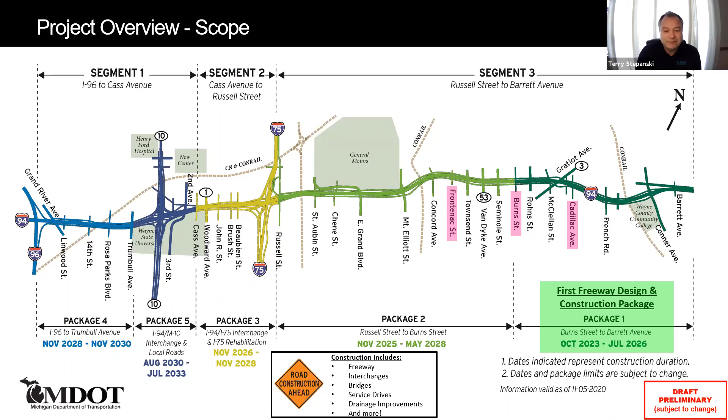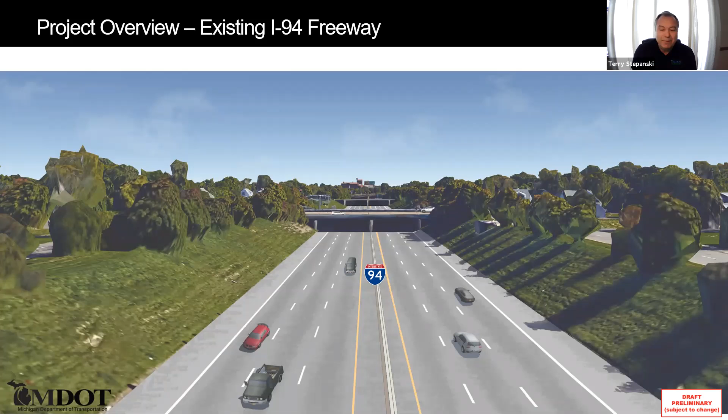Sure, there is some right-of-way impact, some property that we will have to acquire along the corridor, but for a project of this size, the impacts aren't as great as they would normally be if we weren't so focused on remaining within the existing footprint. So these are the main modernization components: wider shoulders are very important, and the acceleration and deceleration ramps being lengthened make for smoother entrancing and exiting of the freeway. Next slide, please.

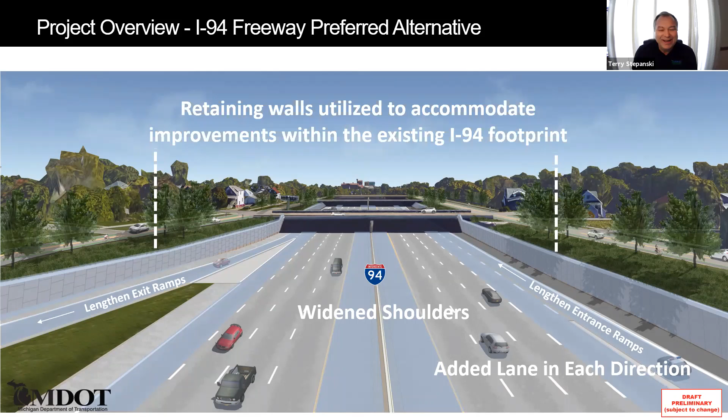The important thing here is we did have a conceptual design many years ago, designed from Detroit of the past. There's been a lot of changes in movement and traffic, changes in the population of the city, and we were really focused on making sure that the future I-94 serves the needs of residents of the city of Detroit, of the motoring public, and supports economic growth. We are really building the exact freeway necessary for current traffic patterns and also patterns in the future.

So what we did is, even though we've been working on this a long time, more recently, starting in like 2015, we were looking at taking a second look at I-94. A lot of that was spurred on by comments that we received from the public.

Some of the main things that we heard was that we really didn't need continuous service roads along the corridor, that service roads were important in some areas, but the important thing is that it connected the community. So we modified the service roads so that we had them where needed, but in other areas there was a more neighborhood atmosphere that would fit into that part of the community. So we looked at that connectivity, as I mentioned several times.

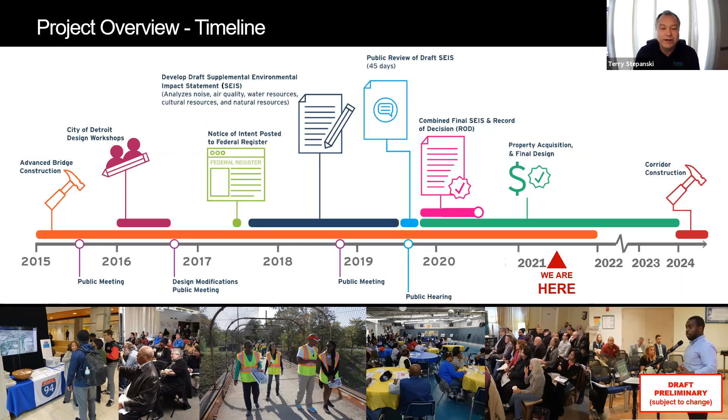The three bridges we're talking about today, Burns, Cadillac, and Frontenac, are three of those. There's several bridges that we've already done that you may have noticed: Gratiot, Van Dyke, French, and several others we've been working on. These are part of the advanced bridge phase that really need work now. So that's what we're doing. Next, please.

One of the things I mentioned this, but it's so important I wanted a separate slide for it. We've worked closely with the city of Detroit on the development of the advanced bridges along the corridor. Originally we had wider bridges that maybe were wider than they needed to be, based on traffic projections of the past. We looked at that, and based on discussions with the city of Detroit, we again looked at the width and size of the bridges to make sure they really fit into the community and provided accessibility across the freeway, meeting the needs of pedestrians, bicyclists, and of course vehicular traffic.

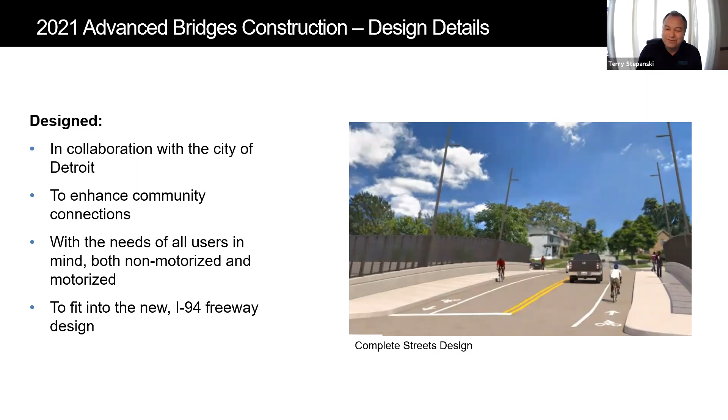So again, we've been working with the city of Detroit to make sure the bridges are the right size and fit into the community, provide the connections, and really meet the needs of all the users. That was an important component because we did modify the bridges in the more recent past to fit the community, with features like wider sidewalks and bike lanes to blend into the community.

We've added some very decorative lighting and also a constellation pattern on the bridges that will be the same as the wall. That was a result of stakeholder engagement too. The constellation pattern represents the stars in the sky, similar to or representing the star navigation that was used by the Underground Railroad. So that's just kind of a sidebar issue as to why that was chosen.

That was an extensive stakeholder engagement, and this was one of the things that we came up with as a result of discussion with the public. Next, please.

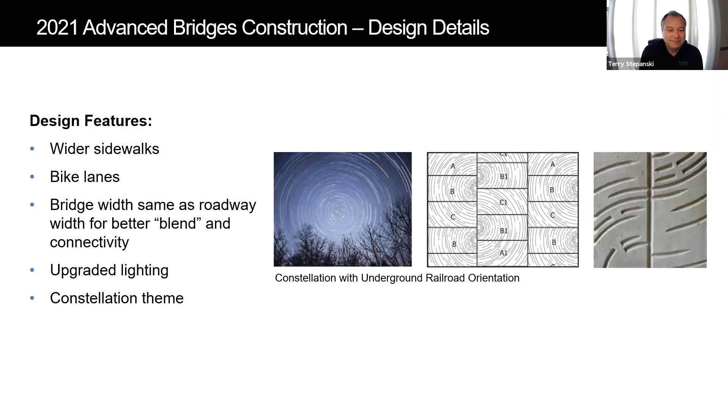And with that, I'm going to turn this over to our construction engineer, Chris Bradshaw, to talk specifically about the three bridges, Burns, Frontenac, and Cadillac, and talk about the schedule and some of the details on that. Chris, over to you. Thank you, Terry.

Like Terry mentioned, my name is Chris Bradshaw with HNTB. I'm the project engineer on the Frontenac, Burns, and Cadillac bridges. On behalf of MDOT, I'm going to go over the construction schedule for these bridges.

You might have noticed the bridges were closed on February 8th, a couple weeks ago. This was to set up the detours and the pedestrian detours and some preliminary work before the bridges can be taken down, such as utility relocations and removals, fence removals. So Frontenac Street will be the first bridge demolished, and that is happening this weekend.

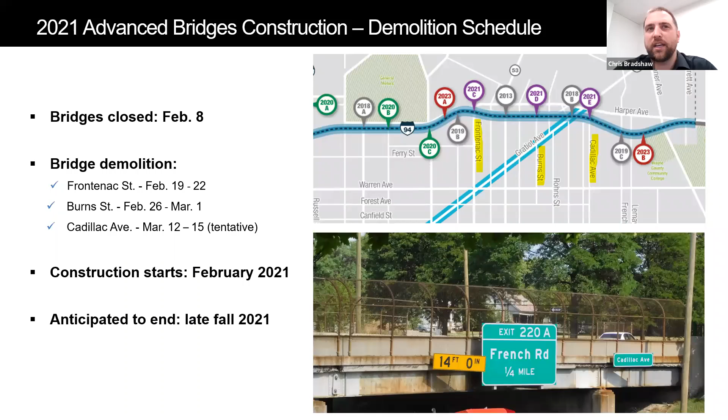Right now, the contractor is getting ready and preparing for that freeway closure. Then the following weekend on February 26th, the Burns Street Bridge is planned to be demolished. And then as of right now, March 12th, the last bridge, Cadillac Avenue, would be demolished. The contractor plans on working at all three bridges at the same time and all throughout the summer, with an anticipated completion date in late fall 2021.

We're adding 2 bike lanes, one in each direction, 8 foot wide, and then the sidewalks will be widened to 10 feet. All this is happening within almost the same footprint as the existing bridge. This adds more multimodal means of transportation, walking, biking, and still maintains the vehicle lanes.

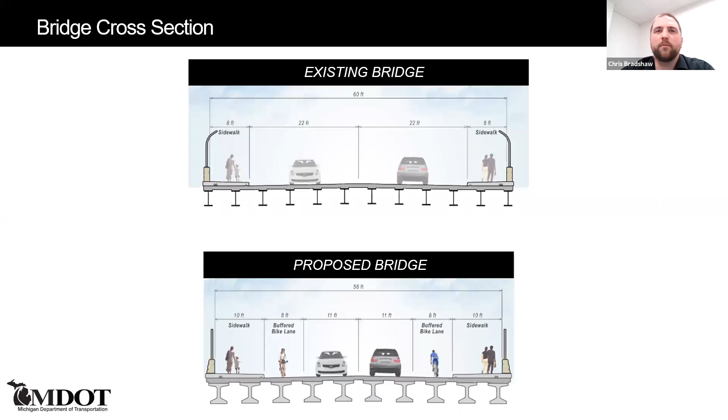So with this, Mark Smith will be presenting next on the local and the freeway detours, and I'll hand it off to him now. Thank you. Thank you, Chris.

My name is Mark Smith with HNTB, and as Chris mentioned, I'm going to walk through some of the highlights of the detour routes for both pedestrians and vehicular traffic with the 3 bridge closures. All 3 of the bridges that Chris had mentioned will be completely closed for the summer with posted detours.

The detours are already out in place for the local closures, with turn-by-turn guidance as you're approaching the bridges. For the Frontenac Bridge, the traffic for both pedestrian and vehicular traffic will be detoured to the west to use the Concord Bridge. This bridge was just recently reconstructed last year, so it's a very good bridge with wider sidewalks that will accommodate the pedestrian traffic.

Along with the closure at Frontenac, the westbound I-94 entrance ramp from Van Dyke will need to be closed. The reason for this closure is that on I-94, we're maintaining 3 lanes of traffic during the bridge construction by shifting traffic onto the shoulder, or in some cases on a temporary widening that we're constructing. Because of that, we have to close that ramp.

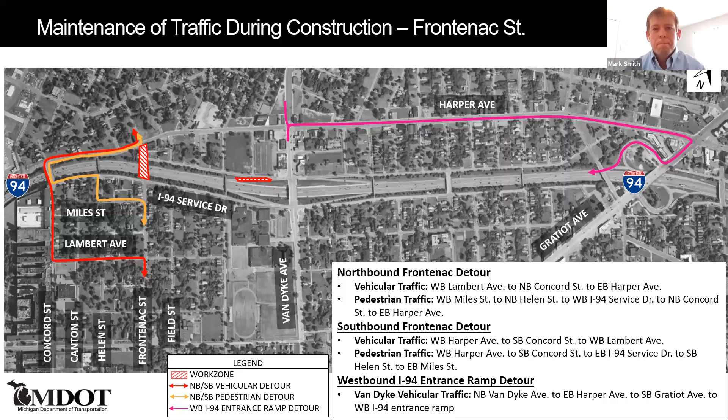For the Burns Street Bridge, pedestrian traffic, shown with the orange arrows, would use Van Dyke to the west. Traffic trying to cross the bridge heading north is detoured over to Van Dyke, and traffic heading south over to McClellan. Both bridges would obviously be open for north and south traffic. We just had the route split to try and avoid the left-hand turns of vehicles traveling across I-94.

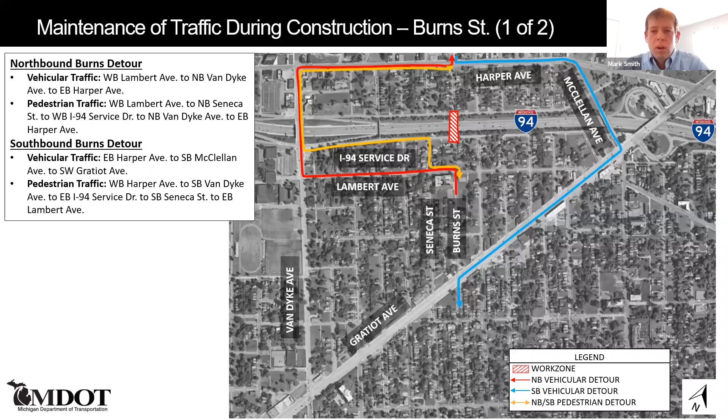Along with the Burns Street bridge construction, there will be another ramp closure. This ramp is the eastbound I-94 entrance ramp from Van Dyke. Traffic that is trying to enter originally at this ramp would be detoured east on Harper and down to the Conner Avenue interchange ramp, and would be able to enter eastbound I-94 at that location.

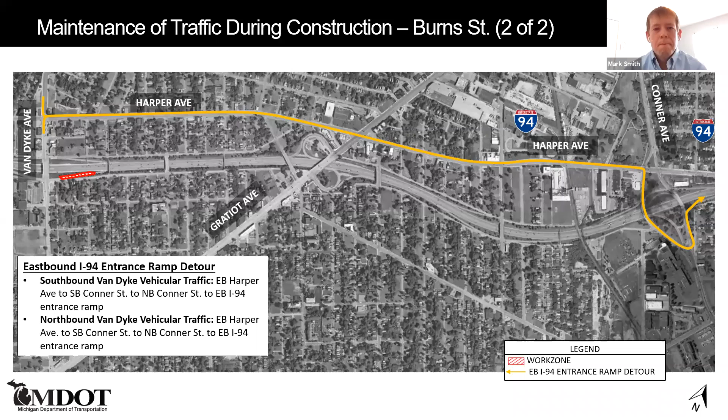For the Cadillac Bridge, the pedestrian traffic, indicated by the orange arrow on screen, is being detoured over to the Gratiot Bridge, shown by the red arrow. That's for the northbound traffic using the Gratiot Bridge, while southbound traffic on Cadillac would be detoured east over to the French Road Bridge.

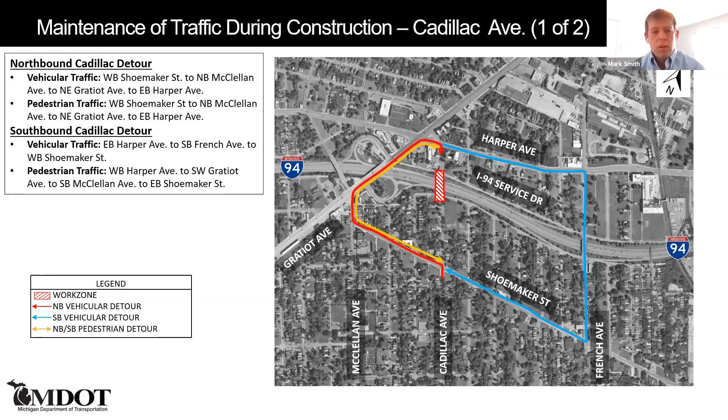With the Cadillac Bridge, several ramps are impacted by this construction, due to the work zone on I-94. Working in the eastbound direction, as you're approaching Gratiot, the eastbound I-94 exit ramp to Gratiot, as well as the eastbound I-94 exit ramp to French, would be closed. Traffic trying to exit at these two points would be detoured to exit at the Conner Avenue interchange, and then come up north using Harper to get back to either French or Gratiot.

Also on the eastbound side, the eastbound I-94 entrance ramp from Gratiot would be closed, with traffic detoured over to French Road where they can enter the freeway with that entrance ramp. On the westbound side, the westbound I-94 entrance ramp from French will be closed, with traffic detoured over to the Gratiot entrance ramp, shown by the orange arrow. The last impacted ramp is the westbound I-94 exit ramp to Gratiot, shown by the black arrow, which would be detoured to Van Dyke, then up to Harper, and back to Gratiot.

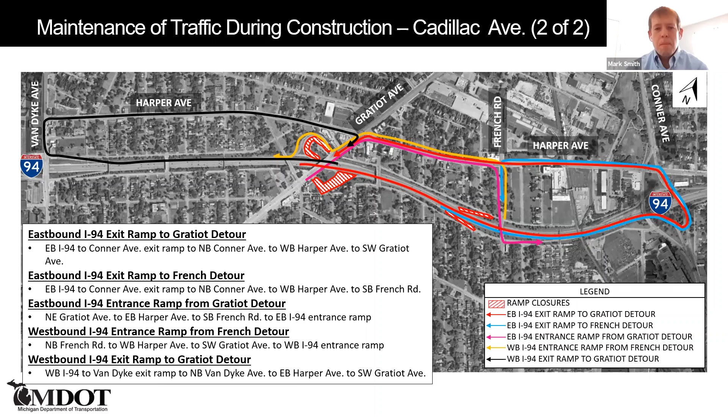Lastly, during the bridge demolitions and later in the summer when the bridge beams are set, there will be freeway weekend closures on I-94 between I-75 and Conner. The posted detour route will be using I-75 to Gratiot, up to 8 Mile, then back to 94.

Traffic coming towards the project on the east side, westbound I-94 traffic, would have access to I-94 all the way up to Conner, where there will be a hard closure. We're just trying to catch the traffic that is really trying to get through the area up at 8 Mile, but local access would have access all the way down to Conner.